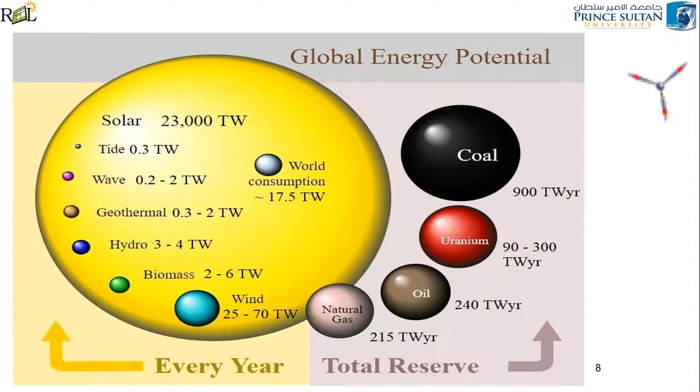If you take solar, it has 23,000 terawatts, and wind maximum 70 terawatts. Hydro we have 4 terawatts, biomass 6 terawatts likewise. As of now, world consumption is around 17.5 terawatts. But the potential itself, if you look at solar and wind, can tackle the world consumption. So how are we going to focus on this smooth energy transition from conventional fossil fuel to green energy based fuels? This is the challenge before us.

Not only that, look at how this energy scenario changes the jobs that will be affected by 2030. Concentrated solar power can have a huge opportunity, then utility PV has a huge opportunity, then rooftop PV, then wind, then waste to energy. Waste to energy is also an important focus as per the IRENA source.

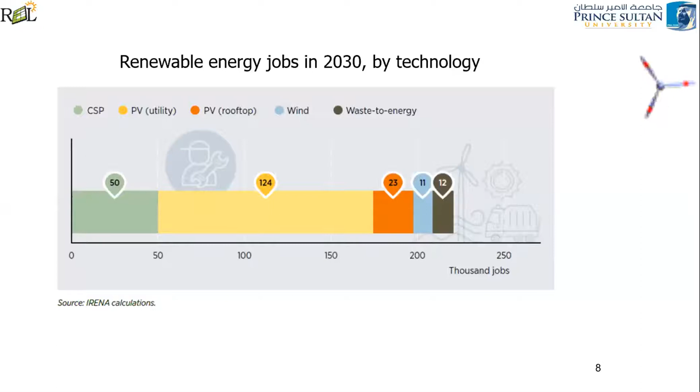Globally, if you look at the status of wind energy, you can see that almost all the Western countries dominate. Apart from that, in our Asian region, China and India also have a huge share in this wind energy scenario. But wind energy is not new to India, because wind energy started in India in the 1990s itself, and there were enough establishments, especially in the southern part of India and most places, and Gujarat, etc.

We have achieved almost 50 to 60% of the wind energy potential already on land. The National Institute of Wind Energy, which is one of the Ministry of Energy's divisions, is now focusing on how they can install wind energy or windmills in the sea side. That's the focus now, and if that happens, we have a very huge potential in the coming years.

So now what is the motivation? The motivation is very simple. You know the current scenario in India, the hot topic and hot news is about the fuel price. They are unable to control the fuel price because of global demand as well as local taxes. So how can we reduce the dependence on the oil economy and focus towards sustainability is the one important goal.

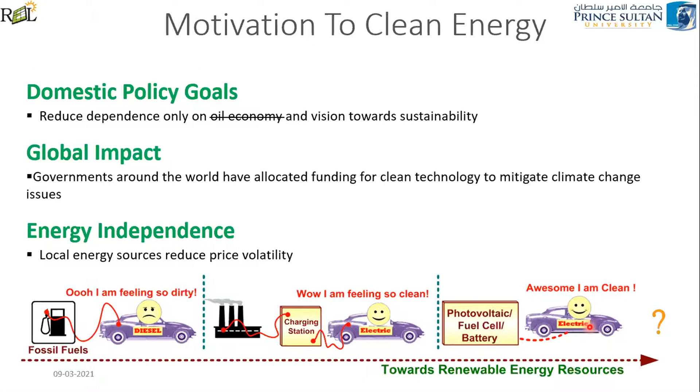So if this change is happening by 2025, imagine how our electricity infrastructure or grid infrastructure should be. It has to withstand all the new demands from electric vehicles, and we should have enough electricity to charge these electric vehicles. This is going to be very challenging, and this transition should happen very smoothly. It's also very, very important.

If you look at it, last July during the COVID-19 lockdown, the central government in Delhi introduced the first public EV charging plaza. They introduced this to the public so that you can come to this plaza and charge your electric vehicle. This is similar to your petrol or diesel charging station.

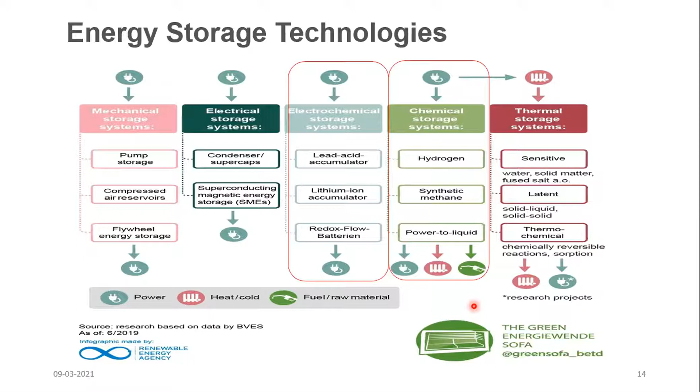Next, if you think about it, the focus is towards the EV, so what's happening is the focus is towards the battery and battery charge. So you can think about how this battery is going to affect cost, and how far the batteries could be replaced or swapped, and how many times the battery can be reused.

For example, take your smartphone. You are charging and using it, but maybe it lasts maximum one day nowadays, because of the lot of applications and features. Then think about the electric vehicle: how long a single battery can withstand, how many kilometers it will cover. So all those analyses you can do.

Also you can think of this as an electrical engineer. You are not students now, you are engineers. So think about after your bachelor degree, many of you may try for a job, but instead of a job, why not become an entrepreneur, so that you can start your own company? Because you are in a very good place, especially in northern India, think about how you can set up charging stations.

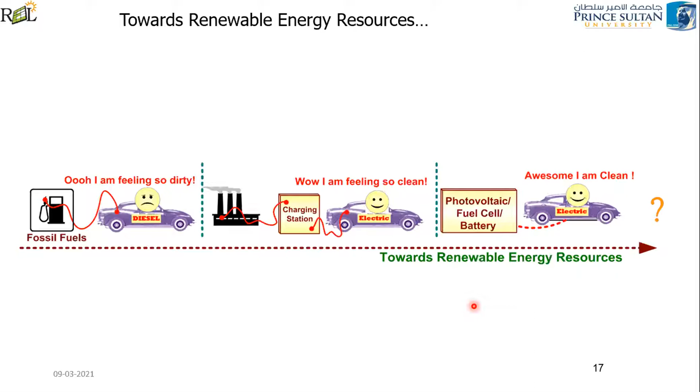As I already told, the Paris Agreement, recently the United States have joined after the Biden government. So what are they focusing on, the Paris Agreement, or you can call it COP21? Energy consumption will double in the next 40 years, and at the same time you have to reduce CO2 emission by half. If you want to do both, then your electrical systems should be 4 times more energy efficient. So that's what I said, the world is focusing not only on CO2 emission, but also on energy efficiency.

That's the reason, as you might know, in recent days earlier we used the fluorescent lamp, then they shifted to CFL, compact fluorescent lamp, then they shifted to LED lamp, to show less energy consumption as well as more energy efficiency. And your air conditioning systems, your refrigeration systems, if you take the heaters, nowadays you can see star ratings. So why the star rating? It shows how energy efficient your electrical equipment is.

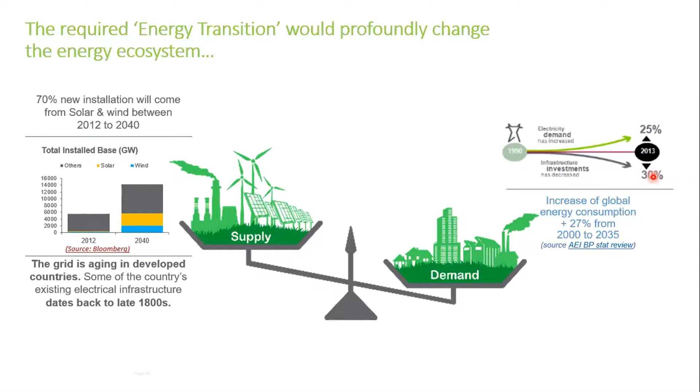So these are the drastic changes that are going to happen. At the same time, if you look at our energy infrastructure, we need to focus on drastic change, because the investment is not that much. If you look at countries like India, in developing countries, the percentage of budget allotted for infrastructure investment should be doubled. Then only we can meet this expectation. So the budget should be doubled, and our focus should also be on this particular infrastructure investment. And if you look at it, if this is the case, definitely we can achieve whatever we are planning for the energy transition.

And if you look at it, what is the role of a customer, as a university or as an institution? What is your role? As a military, what is their role? As a city or community, what is your role? As a public, what is your role? As a commercial establishment, what is your role? So all the roles we should define, so that we should take ownership of doing this.

We should not expect the government will do all the things. Each and every one of us should take the role and leadership to achieve this transition smoothly.

In the coming years, you can expect a drastic change in the real estate market. Nowadays the real estate market focuses on very posh apartments, individual bungalows, and independent buildings. But for the next 5 to 10 years, the real estate market will drastically shift because it will focus on how you can make more energy efficient houses and buildings.

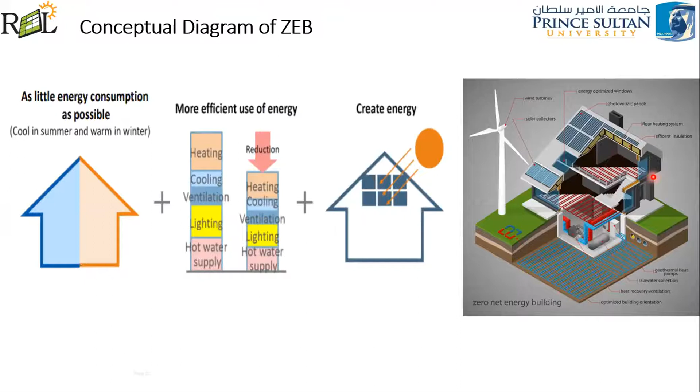You call it a smart home or smart building. There's another concept called net zero energy building, which is also the focus in the coming years. A net zero energy building generates its electricity on its own, without electricity lines from the grid. It has natural ventilation, generates its own heating, has its own energy storage, and has construction that accepts natural light inside the house.

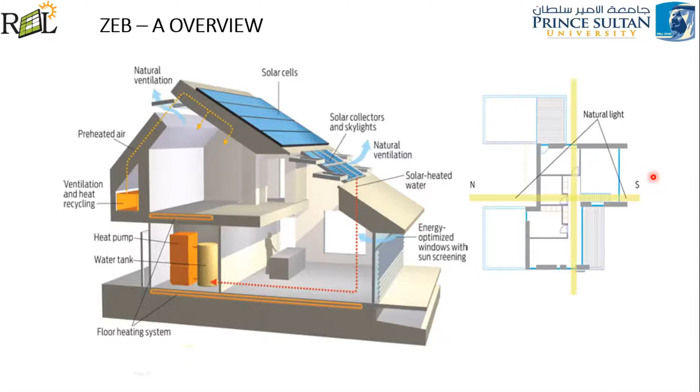Floor heating systems are not available in our country as of now, but in most Western countries it is available, maybe in locations like Siliguri or the northern region. In the coming years it may require this kind of floor heating system to provide heating inside the house during winter time. Recently the IITs, especially IIT Madras, have come forward to introduce a DC grid, and they provided this DC grid to their neighborhood as well.

What is meant by DC grid? This is the focus towards the transition from AC to DC. Earlier, in the 1900s, they started with DC only, but since most electrical equipment was AC, they shifted to AC electrical grid. Now it is going to reverse again in the coming years, because of renewables like solar and wind, because of battery energy storage, and because of electric vehicles, since electric vehicles have batteries which are DC. So you need to charge these electric vehicle batteries as well.

Given this scenario, there is going to be more DC grids and DC homes in the coming years. The location of your institution is also one of the prime locations where you can have more opportunity for a DC grid rather than AC grid. Based on this, most companies like Philips or LG, or any electrical companies, have already started manufacturing DC electrical equipment like refrigerators, lights, etc. Gradually, the entire home is going to change into a DC home. Because of this, the amount of energy waste will reduce and efficiency will be much more if you go with the DC grid.

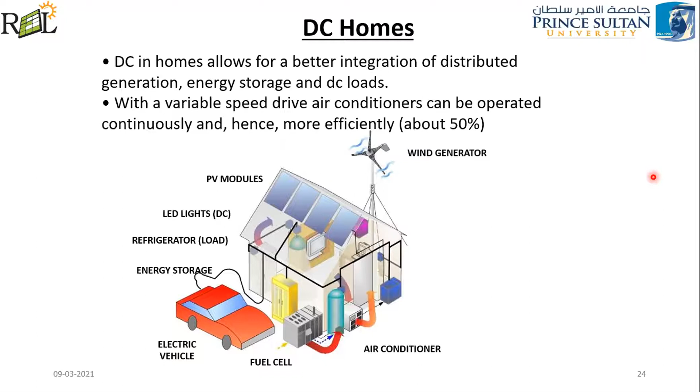There is also a huge transition from the technology side, like big data, artificial intelligence, and cyber security. More and more technology is coming into the picture, and IoT is playing a huge role in electrical systems in the coming years. So builders and constructors in the real estate sector will focus on smart home automation systems. For example, from your office itself, you can operate your washing machine or control electrical equipment like the electrical oven. This is possible in the coming years with the help of technology, which will also help achieve this energy transition.

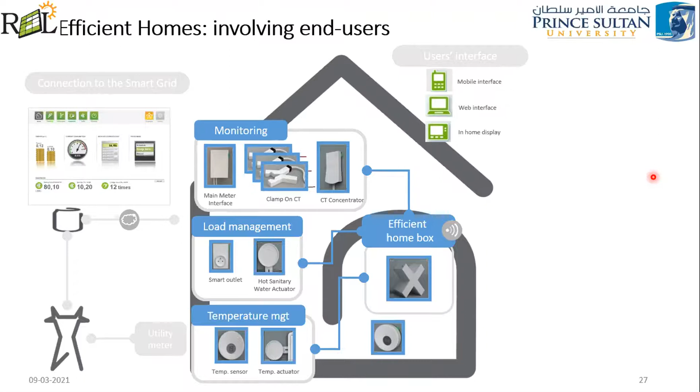You will be able to see on your mobile how much energy you are consuming and how much you are going to pay in the coming months. All of this will happen in the coming years. Not only that, your office buildings and factories will also be connected with technology. Even though you have renewable based electricity, the question is how effectively you can manage this enterprise efficiently.

For example, power management, building management, process management - all these things will happen. Even if you look at the software companies now, their focus is also towards this, and they're coming for campus interviews, distributing the selected students in these particular domains. Recently one of the surveys has mentioned this.

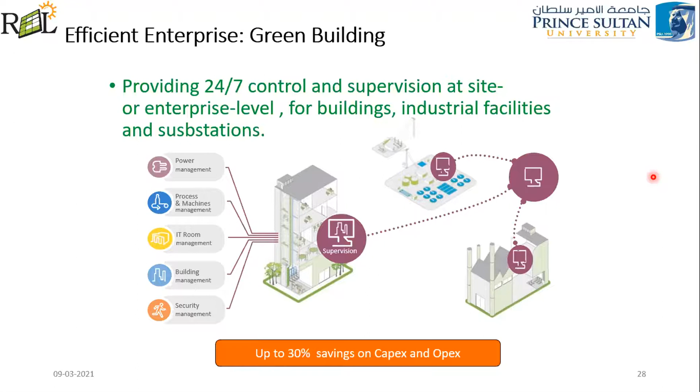Not only the government but also the public and private sectors, and the individuals - how are we going to shift towards this change? That is a huge challenge.

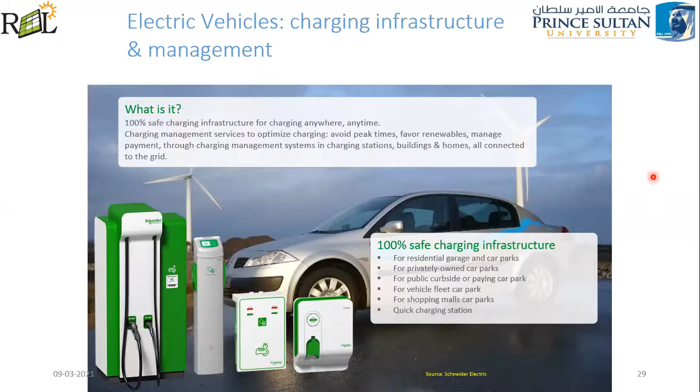Our focus is also on building infrastructure, because you need your EV, the electric vehicle, to be charged in your home. For that, your home should have renewable energy and very good energy efficient electrical equipment, because you need to manage the electricity consumption.

So this is low energy system devices as well as utilization of renewable energy sources, along with passive energy saving technologies - that means high performance windows, natural lighting, natural ventilation, building integrated photovoltaic systems. All these things will come in the coming years. So these are the technologies.

If you want your building with renewable based technologies, there are two options - active and passive. Active means you can get help from renewable energy or backup systems like fuel cell, energy storage, battery, etc. In the passive system, the building itself needs to be designed with a very good envelope design, heat storage system, and lighting design. It should allow natural lighting, natural ventilation, and have building integrated photovoltaic as well.

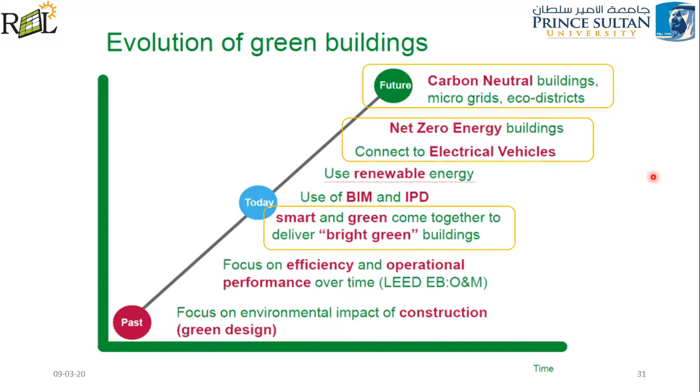In that aspect, the focus is towards sustainable development goals. That's the reason why the United Nations incorporated this sustainable development goal to achieve this. Maybe your club also can focus on these sustainable development goals.

Especially Sustainable Development Goal 7, carbon neutral affordable energy, and Sustainable Goal 11, sustainable and green practices for better living in cities. Then Sustainable Goal 12, recycling, reusing, and waste management - you can divide groups in your club so that various groups work on these various goals. Then Sustainable Goal 13 is focusing on mitigating climate change. These are very important things which should drive your club.

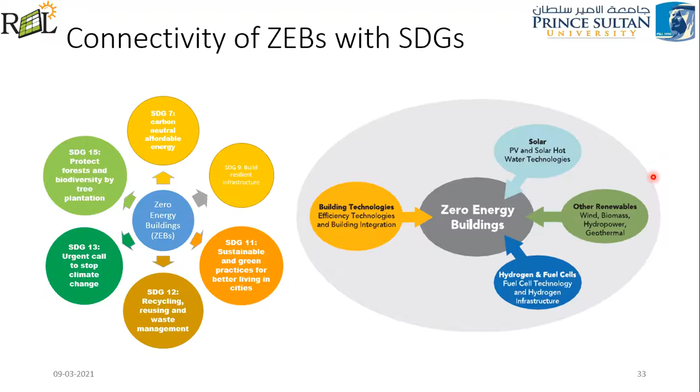This transition will happen in multiple ways. One is decentralized power plants, another is rooftop PVs and carport structures - either big power plants or small power plants in the home, office building, shopping malls, and commercial buildings.

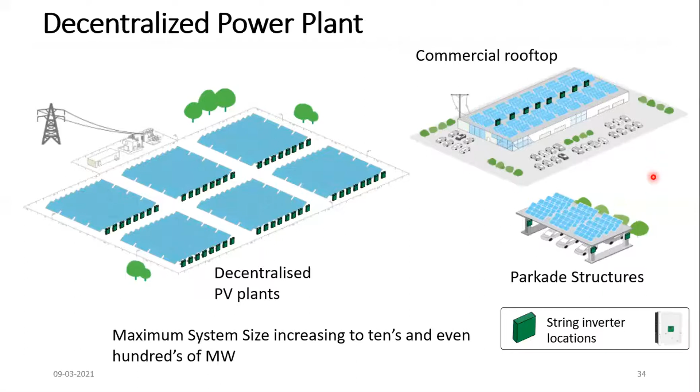In the building rooftop you can see solar panels, it has natural ventilation, more greeneries coming in the coming years, and the building will generate its own electricity. This is the kind of smart city we really expect in India.

As of now, the smart city project in India focuses only on development of the city, not in terms of energy generation. They focus on how to serve people better, traffic regulation, clean and green environment, waste collection - but they didn't focus on how the city can generate its own electricity or manage waste. All those things should be focused on in India.

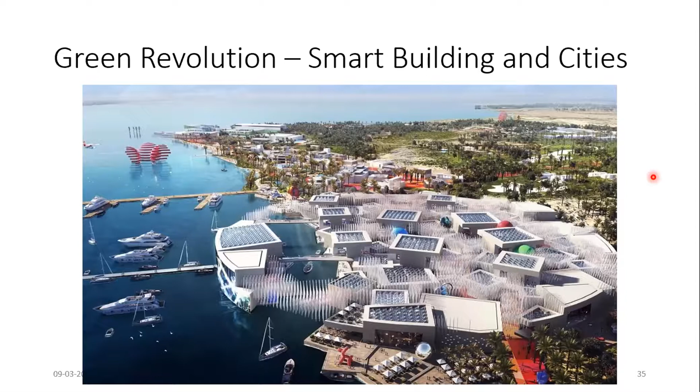This is going to be the real smart city project, like the ones here. This is what we are expecting from the Indian scenario also. To achieve this, we need to focus on growing electricity demand - because more electric vehicles means more demand - and at the same time focus on how to reduce CO2 emissions.

It will not happen automatically. Recently during COVID-19 they said carbon dioxide reduced drastically, very good, etc. But now we have come back to normal life, everybody started using vehicles, buses, transportation, so now CO2 emissions might have increased again. The focus should be on how to reduce CO2 emission rather than a temporary solution.

There are constraints on the existing electricity networks, so we need to improvise a lot. Who is going to help? As an individual, you are going to help. The government should also support, and the technology providers, all public and private companies should also support. Only if everything is in place can you achieve it.

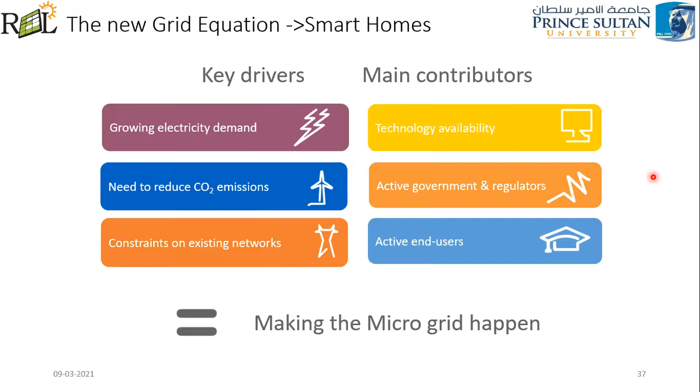As of now, energy transition is from centralized power generation units, transmitted to distribution, and distributed to the public - the consumers. Now the focus is towards renewable energy power plants, distribution side renewable plants, as well as rooftop renewable plants in your office or house for residential applications. This makes the consumer very active with the help of technologies.

If you look at it, since it's not from long distance, there is a saving of considerable energy. So there is no considerable loss because you have your own power plants, especially on the distribution as well as the consumer side.

Now you have a better option to charge your electric vehicle. So this is possible now, and you can claim that we are having clean energy generation as well as less emission. This is only possible with the help of communication and IT-based technologies like IoT, artificial intelligence, big data, etc.

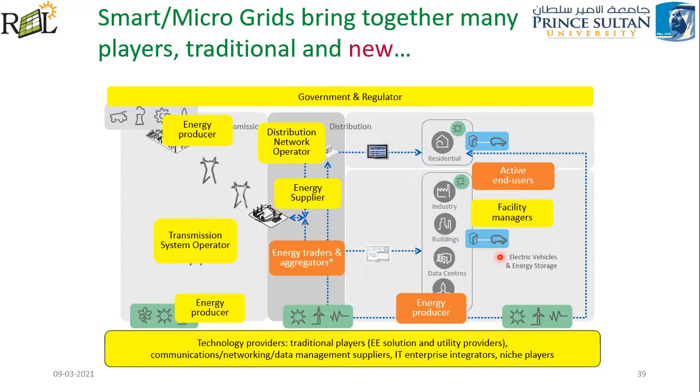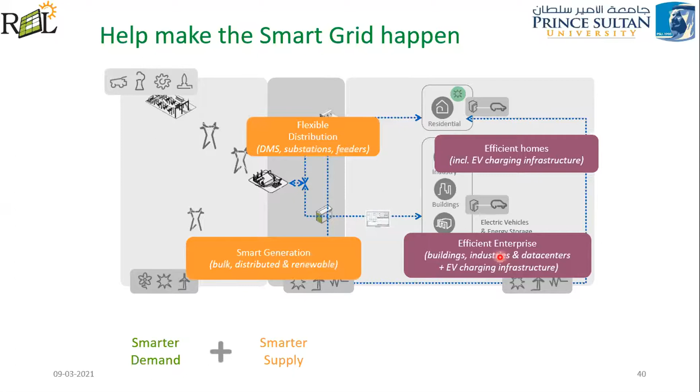Only then, if you have an efficient home with provision for charging your EV, or an efficient building or industry with EV charging facility, then your distribution side is very flexible with smart generation - that means using renewables with digital substations. Now everybody is shifting towards digital; recently they talked about Digital India, etc. So the substation also should become digital. Only then can you easily control it using big data analytics.

Then your demand response will be very good, and all these things together will help achieve a smart grid. This transition should take place very smoothly as well as at a fast rate, in the coming 5 to 10 years.

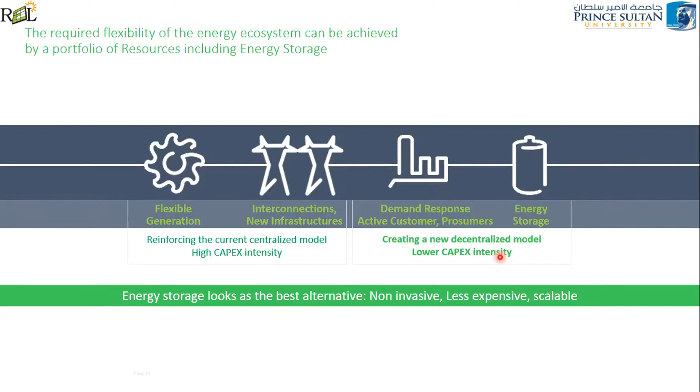Only then can you say you achieved a smooth energy transition as per the United Nations Sustainable Development Goals, as well as per the needs of the country. This is going to be achieved with the help of various sectors - generation, transmission, and distribution - with the help of technologies like energy storage, which will also be helping in the coming years.

Now look at this - this is ultimately going to be the smart city, not without this. Without these things, you cannot claim smart city.

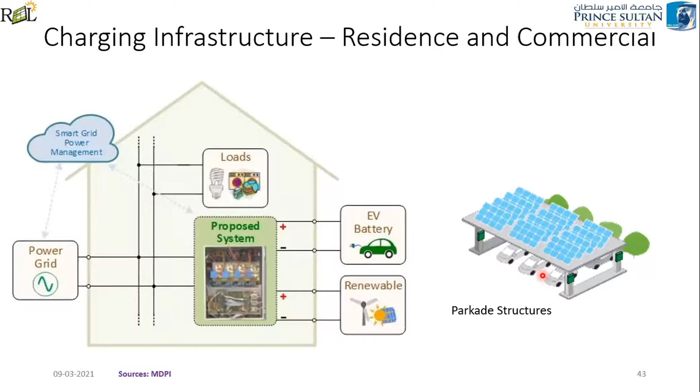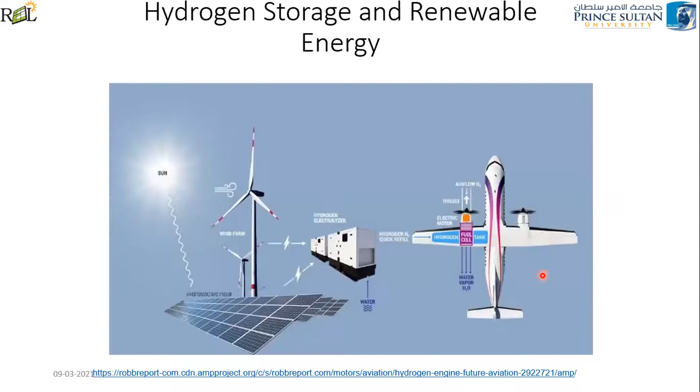So I'm just quickly showing what topics you can work on in your club - this is the topic for energy storage, hydrogen energy storage using renewables, and AI, big data, and IoT, and how it plays a role in renewables.

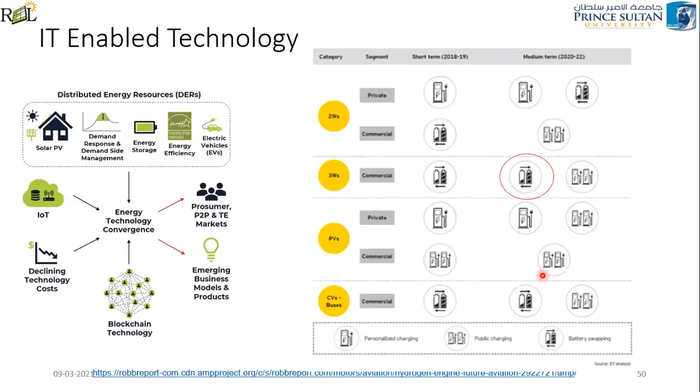How IoT, blockchain, and these technologies will help in achieving this global energy transition towards green energy. With this note, we are also working towards the sustainable development goals. We are organizing a conference as well, and I welcome students, faculty, and researchers to submit their work and papers. We are charging very low registration fees, and we are publishing in Scopus. I'm also a guest editor for the journal Energies, which matches today's topic of sustainable energy transition, utilization and management. I'm focusing on SDG 7, and we welcome researchers to participate.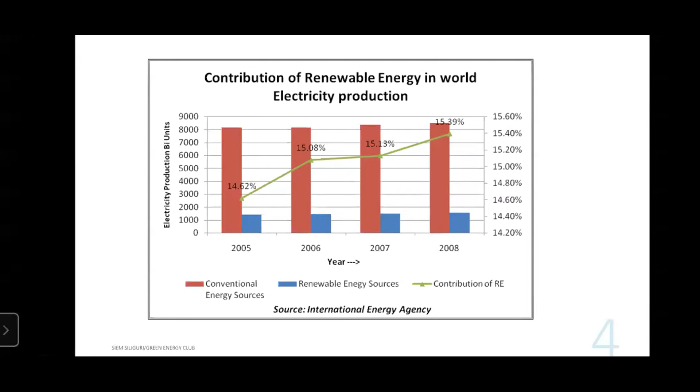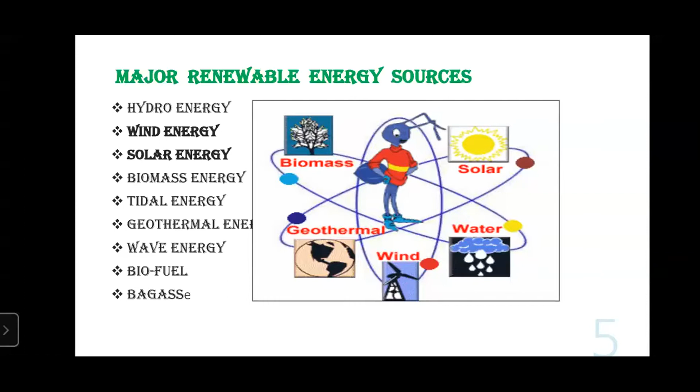Here we are going to introduce different kinds of renewable energy sources: hydro energy, wind energy, solar energy, biomass energy, tidal energy, geothermal energy, wave energy, biofuel, and bagasse energy. Going forward, with wind energy.

Particularly suited for offshore and high altitude sites, wind energy uses the power of the flow of air around the world to push turbines that generate electricity. Differential heating of the earth's surface and atmosphere induces vertical and horizontal air currents. The turbine obtains its power input by converting the force of the wind into torque, acting to rotate the blade. The amount of energy which the wind transfers to the rotor depends on the density of air, the rotor area, and the wind speed.

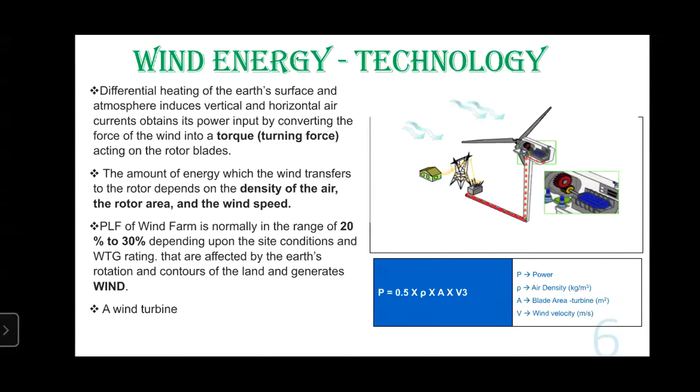Going forward with solar energy, this common renewable green energy source is usually produced using photovoltaic cells that capture sunlight and turn it into electricity. Solar power is also used to heat buildings and for hot water, as well as for cooking and lighting. Solar power has now become affordable enough to be used for domestic purposes, including garden lighting, although it is also used on a large scale to power entire neighborhoods.

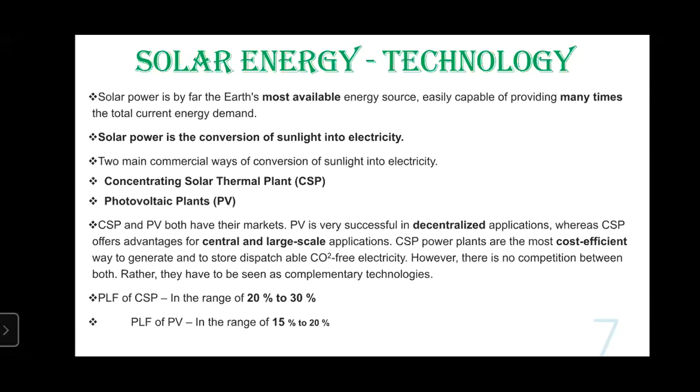Solar power is by far the Earth's most available energy source, easily capable of providing many times the total current energy demand. Solar power is the conversion of solar energy into electrical energy. The two main commercial ways of converting sunlight into electricity are CSP and PV.

Going forward with geothermal energy, this type of green power uses thermal energy that has been stored just under the Earth's crust. While this resource requires drilling to access, thereby calling the environmental impact into question, it is a huge resource once tapped. Geothermal energy has been used for bathing in hot springs for thousands of years, and this same resource can be used with steam to turn turbines and generate electricity. The energy stored under the United States alone is enough to produce 10 times as much electricity as coal currently can.

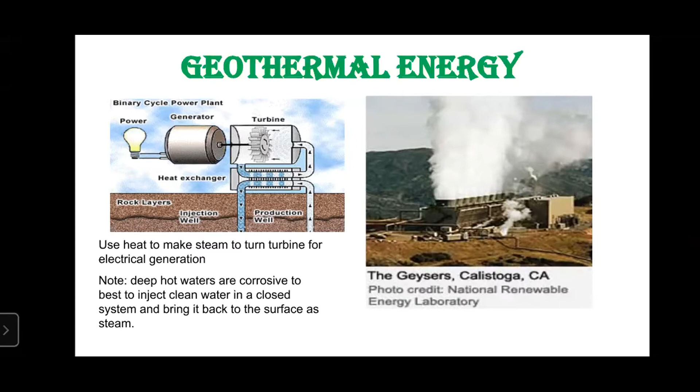Sure, you just keep sharing. I'll join the meeting from here. Okay, Hira? Yes, okay, I'll share, you can.

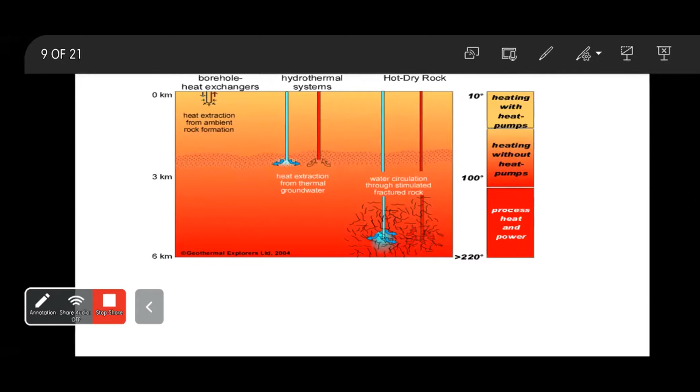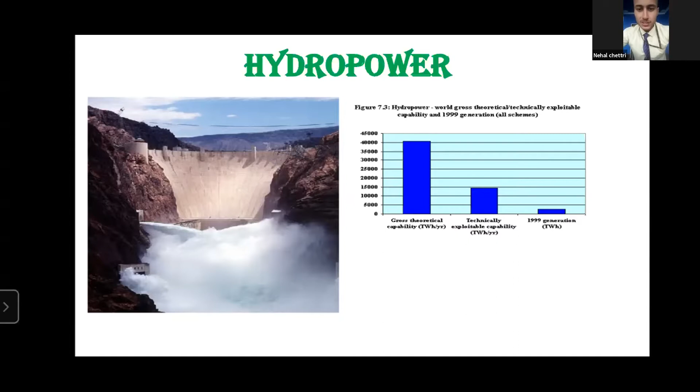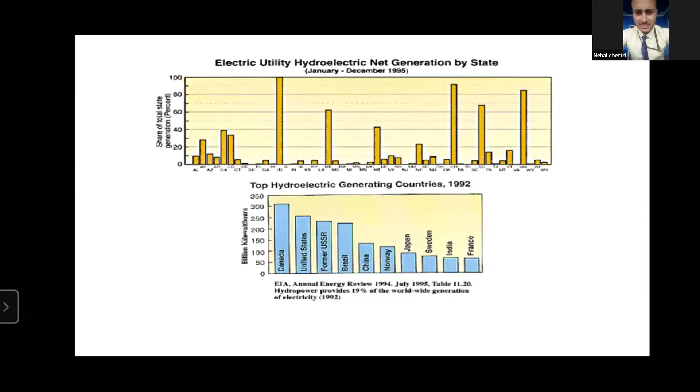Next is a very important aspect of today's presentation, that is the importance of green energy. So first point, green energy is important for the environment as it replaces the negative effects of fossil fuels with more environmentally friendly alternatives. As we all know, fossil fuels have many negative effects on our environment, and thus green energy can be used to substitute those effects.

Next, even when the full life cycle of a green energy source is taken into consideration, they release far less greenhouse gases than fossil fuels. As we all know, with the release of greenhouse gases, the temperature of our atmosphere increases, and as a result it leads to global warming, which results in many environmental hazards. This can be stopped by the use of green energy. Green energy can also lead to stable energy prices as these sources are often locally made, and green energy also has a lower price compared to fossil fuels. These are the advantages of green energy as compared to fossil fuels.

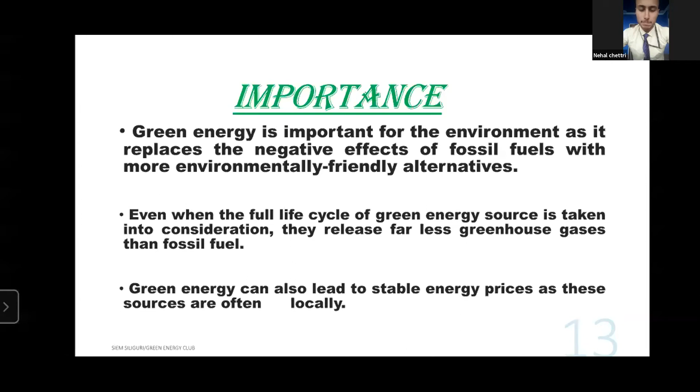Next is likely climate change impacts. Firstly, we have health impacts, we have infectious diseases which come as a result of climate change. Then we have agricultural impacts, where crop yields are decreased significantly with increasing or lower temperatures.

Next, we have forest impacts, where forests are drying up, and as a result they catch fires, reducing productivity. Then we have water impacts, where sources of water are dried up because of the change in climate. And then we have impacts on sea and coastal areas, where the melting of ice on the polar regions causes sea levels to rise, and as a result, islands and low-lying areas are flooded and submerged underwater.

And then we have species losses. In species losses, we have loss of habitats of animals, for example polar bears. Polar bears live in the icy areas of polar regions, but due to the melting of ice, their habitat is lost and they are at the verge of extinction. That's the best example of species extinction due to climate change. Next slide.

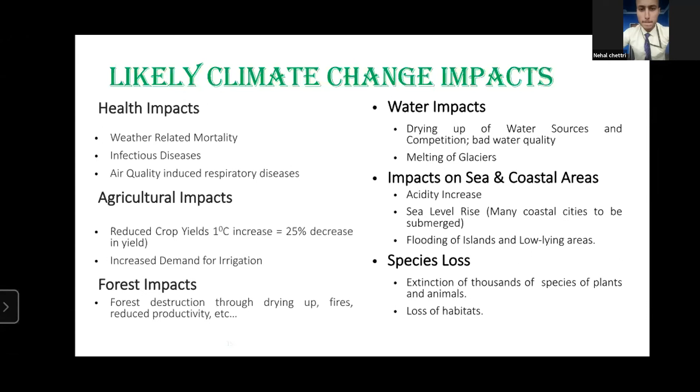Okay, this is the data of regional impacts of climate change in India. We have the Himalayan region where there is impact on horticulture crops, increased landslides, glacial lake outbursts, and reduced snowfall and glacial retreat. And we have coastal regions where sea level rise induces out migration, submergence of cities, and damaged infrastructure. Then we have arid regions of Rajasthan and Western Gujarat, where there is desertification, stressed grasslands, and damaged animal health.

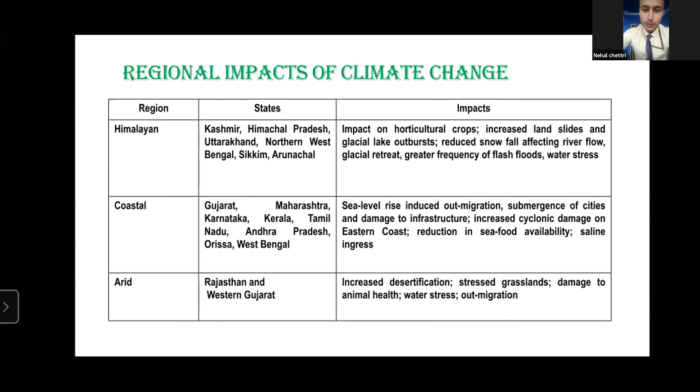We have semi-arid regions of Punjab, Haryana, and Western and Central Madhya Pradesh, where impacts are increased variability of rainfall, alternate droughts and floods, and loss of agricultural yield. We have central forests of Madhya Pradesh and Chhattisgarh, where forests drying up leads to forest fires. We have the Gangetic plains of Uttar Pradesh, Bihar, and West Bengal, where there is loss of agricultural yield and an initial increase in river runoff, followed by a reduction in perennial river flow.

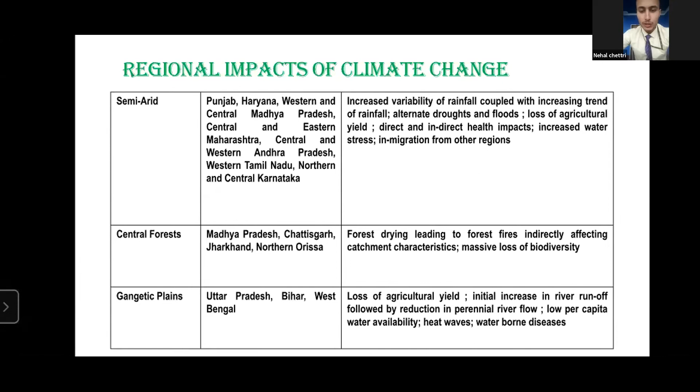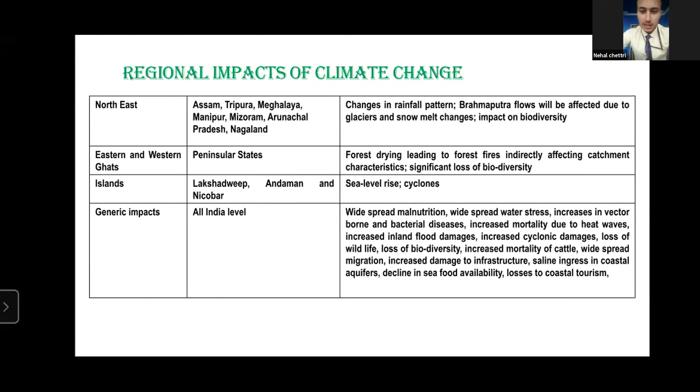In the Northeast, changes in rainfall pattern will also affect Brahmaputra flows due to glacier and snow melt changes. In the Eastern and Western Ghats of peninsular states, forest fires affect the catchment characteristics. And in the islands of Lakshadweep and Andaman and Nicobar, there is sea level rise impacts.

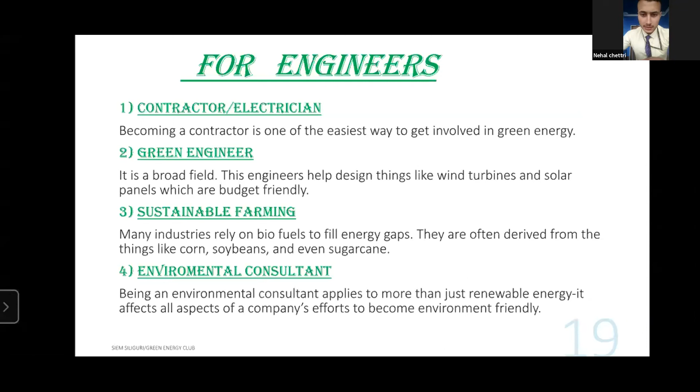And we have environmental consultants, who help companies become more environmentally friendly. At last, we have a conclusion: green energy is said to be a part of the future world, offering a cleaner alternative to many of today's energy sources. Being readily replenished, these energy sources are not just good for the environment, but also lead to job creation and look set to be economically viable as developments continue. Thank you so much.